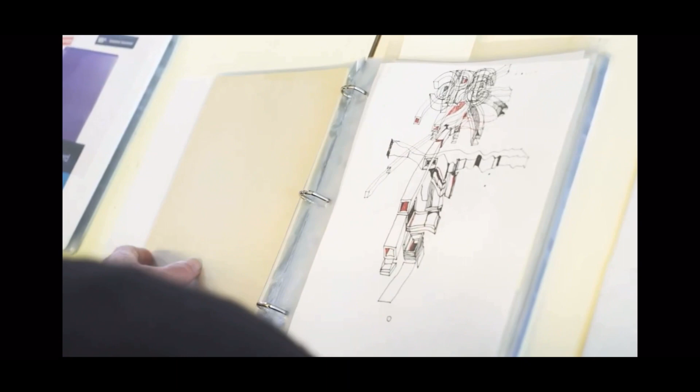Peter David Eisenman was born on August 11th, 1932, in New Jersey, USA. He pursued his passion for architecture, earning a Bachelor of Architecture from Cornell University in 1955, and continued his academic journey, obtaining a Master of Architecture from Columbia University in 1960.

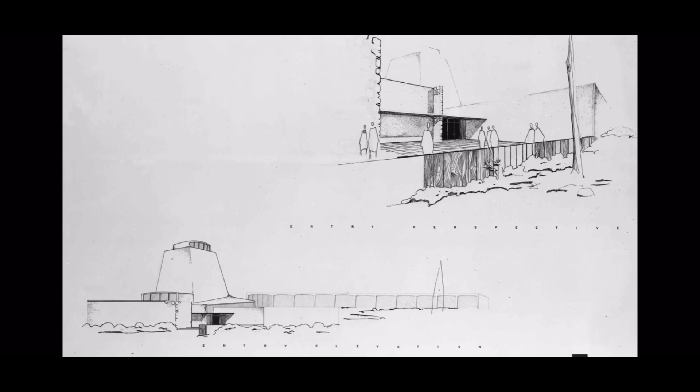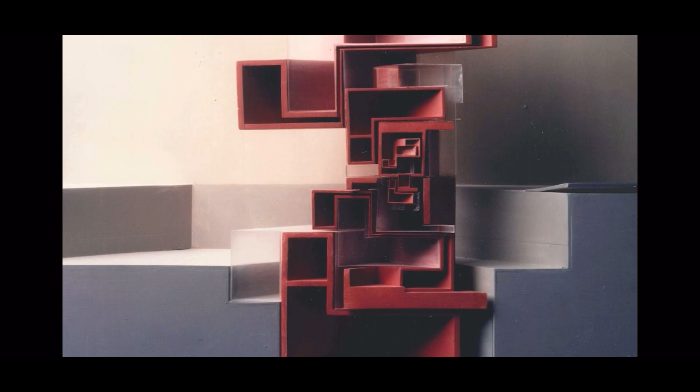In 1980, he founded his architectural firm Eisenman Architects, which became a platform for his avant-garde and experimental designs. Eisenman also dedicated his time to teaching, sharing his knowledge at institutions like University of Cambridge, Princeton, and Cooper Union, for the advancement of science and art.

Eisenman's architectural approach challenges convention, and he is a prominent figure in the deconstructivist movement. He explores the intersection of architecture, language, and philosophy, infusing his work with intellectual depth.

Some of his notable projects include the Wexner Center for the Arts in Columbus, Ohio, completed in 1989; the Memorial to the Murdered Jews of Europe in Berlin, Germany, a significant work completed in 2005; and the ongoing multi-phase project, the City of Culture of Galicia in Santiago de Compostela, Spain, which showcases his unique design approach.

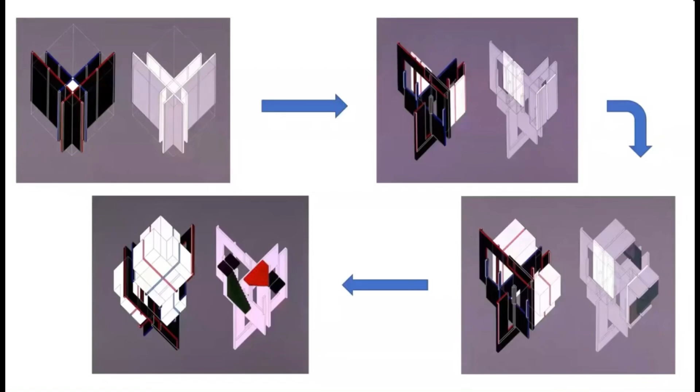Eisenman is known for his critique of the term postmodernism and its application to architecture. He argues that modern architecture was never fully realized, making postmodern architecture an inappropriate categorization. Eisenman contends that the modernist project was never completed, and therefore the idea of postmodernism is misleading.

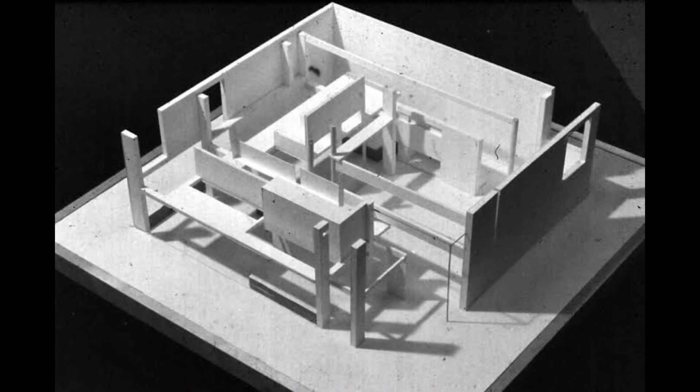His architectural approach is highly abstract and conceptual. He views architectural form as an abstract process, emphasizing the importance of theoretical concepts, compositional devices, and geometric abstractions. In architectural design, his work often challenges traditional conventions, such as their reliance on load-bearing walls.

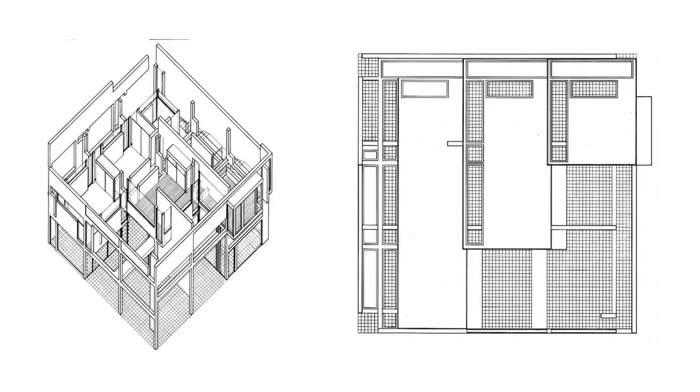Now, let's dive into House 2. House number 2, completed in 1970, is a residential structure located in Vermont, USA. It's a pioneering example of deconstructivist architecture, known for its unconventional and non-linear forms.

Eisenman believes in performing and conceptualizing architectural design abstractly. In House 2, he sees architectural form as an abstract process. He used a 9-square grid inspired by Palladio to create an unconventional structural framework.

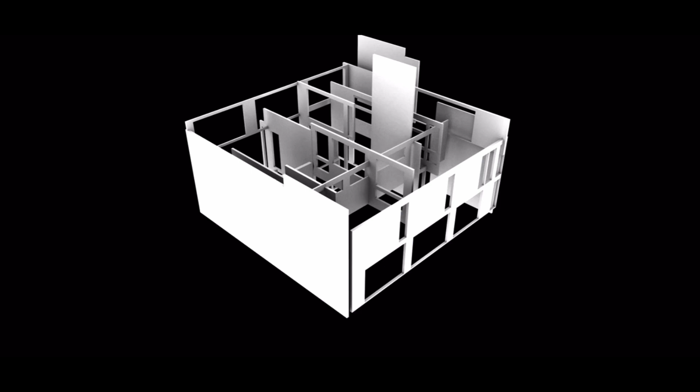The grid is not only structural but also a key part of the design aesthetic. We can say that it's the backbone of House 2's organization.

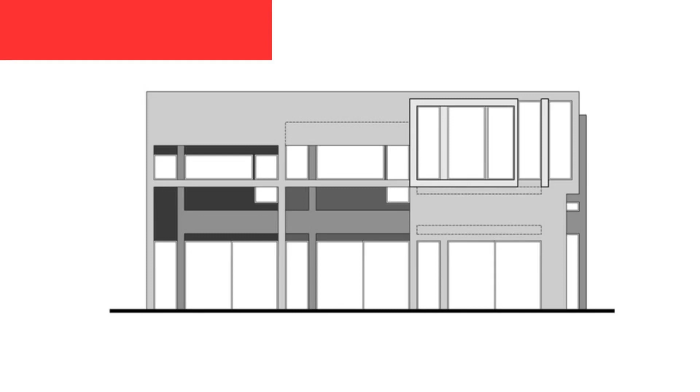Eisenman suggests that architecture should go beyond its traditional balance of function and form, allowing more flexibility and innovation in design. House number 2 is organized around a grid, just as we discussed.

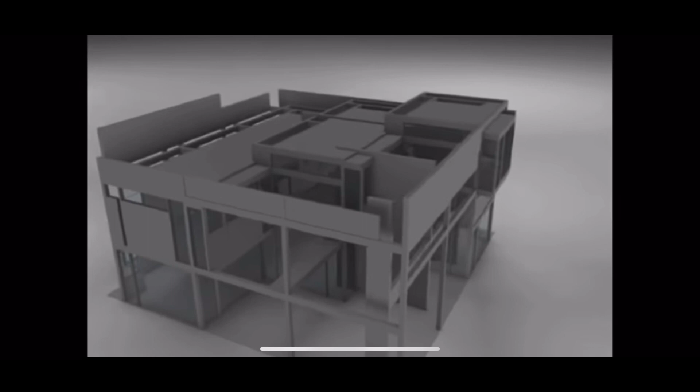It features fragmented and angular geometry using raw materials like plywood and concrete, often left exposed to highlight the industrial character. The interior spaces blur the lines between inside and outside, creating ambiguity.

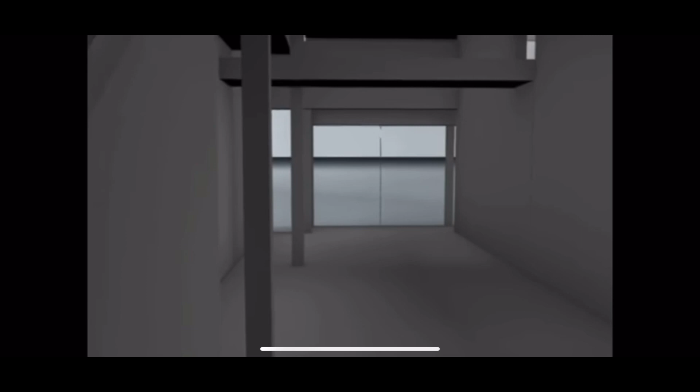The layout is complex and non-linear, and the interplay of light and shadow adds to the spatial intrigue. Its grid-based composition, fragmented forms, and complex spatial relationships create a dynamic and visually intriguing experience.

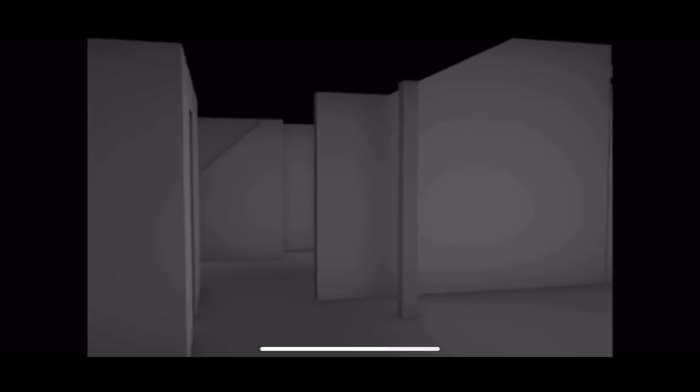We can say that Eisenman encourages architects to move beyond the direct representation of function in architectural design, fostering a dialectical relationship between form and function. This challenges the cultural assumption of functionalism and allows for greater flexibility and innovation in design.